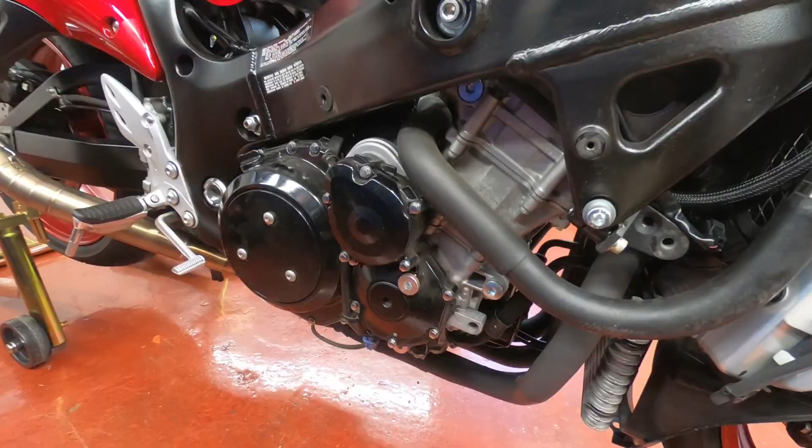Alright guys, I'm gonna check the valves. I know I was supposed to do the coolant video today, but the valve clearance has been in my head. I just wanna knock this one off to take it off my to-do list. So obviously the seat comes off, the tank comes up, and the side fairing has to come off so we can have access to the crank and the timing mark here.

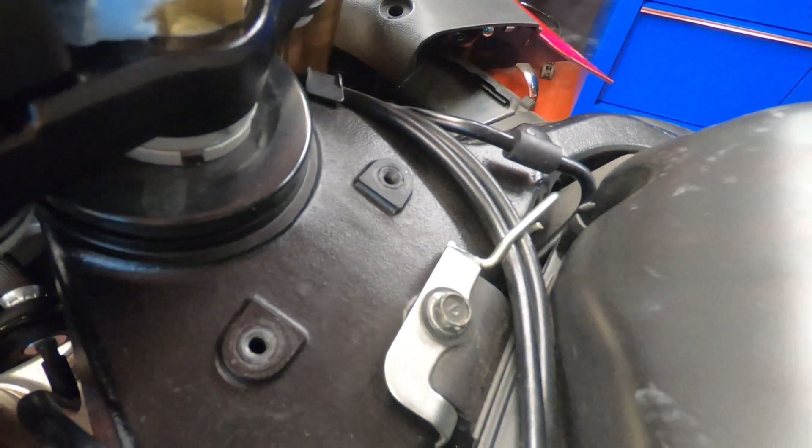Okay, next step, I have to remove the air box. But since I'm gonna clean the air filter anyways, I'm gonna take off the cover first. But if you want, you can take the whole assembly. And before you do that, of course, you gotta take off this bracket here that holds the cables. And keep in mind how these cables run so they don't confuse you later. Remove this connector for the air temperature sensor.

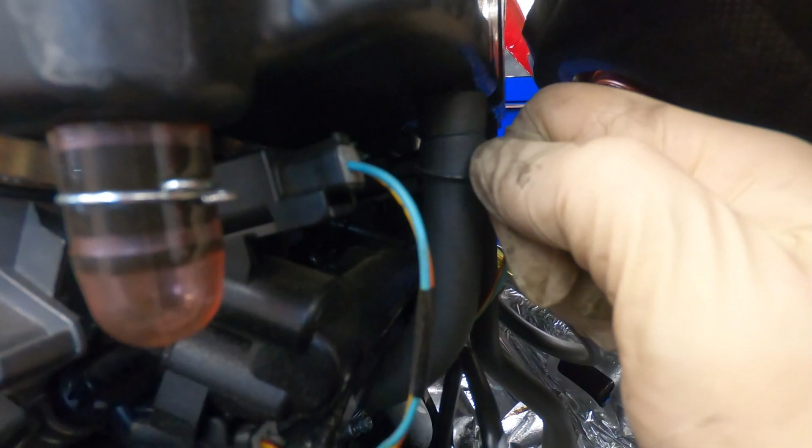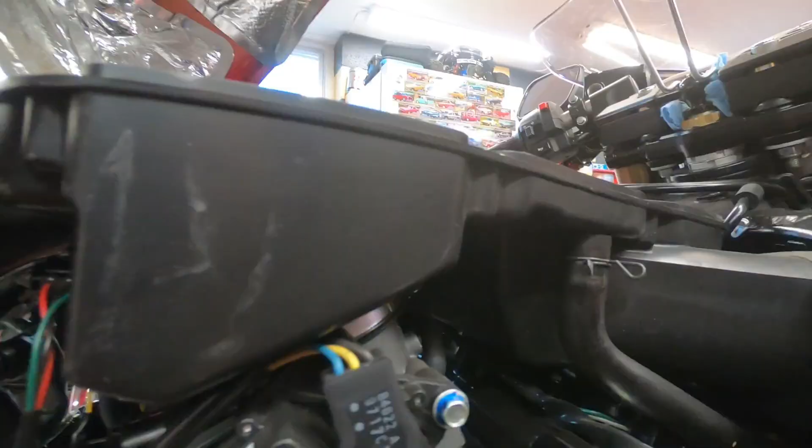And then we got a hose over here. Just squish this with your channel lock fingers. Same thing here, there's another one. And with this you can use my lovely trick. Okay, going to the other side. We got one more hose over here. And then we have this connector. I'm gonna pry it off from the bracket, from the back side first. I'll show you how it looks.

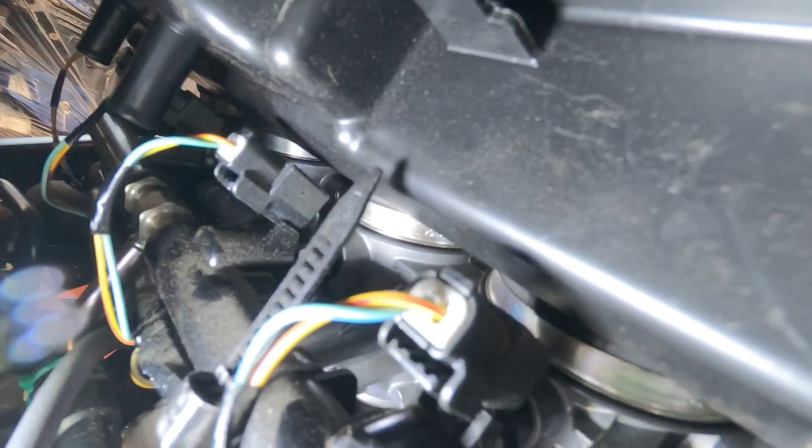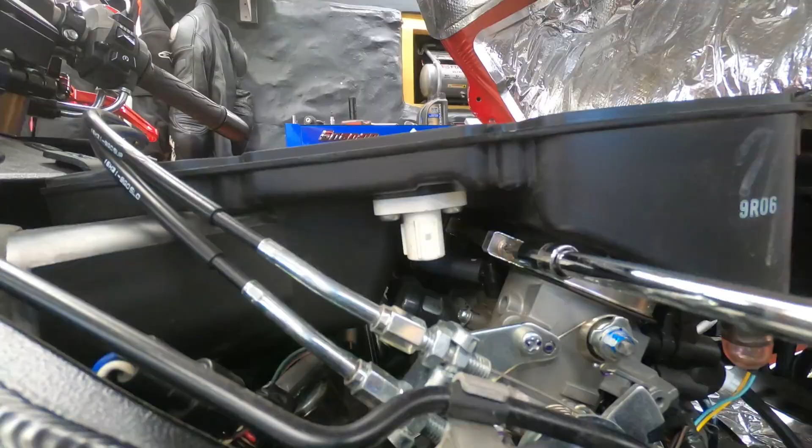That's how that bracket looks, where it goes over here. Now I just have to loosen this bolt here, and you just have to loosen it a few turns. You don't have to completely take it off. And then same thing on the other side. Now I have to break the airbox free from the throttle bodies. So whatever it takes, you know?

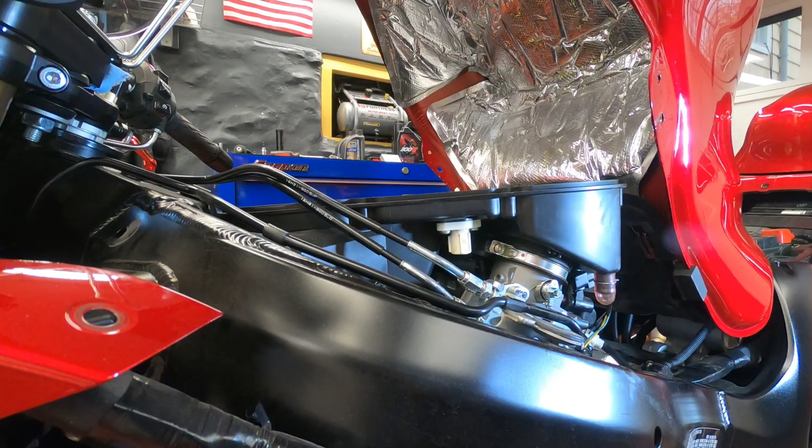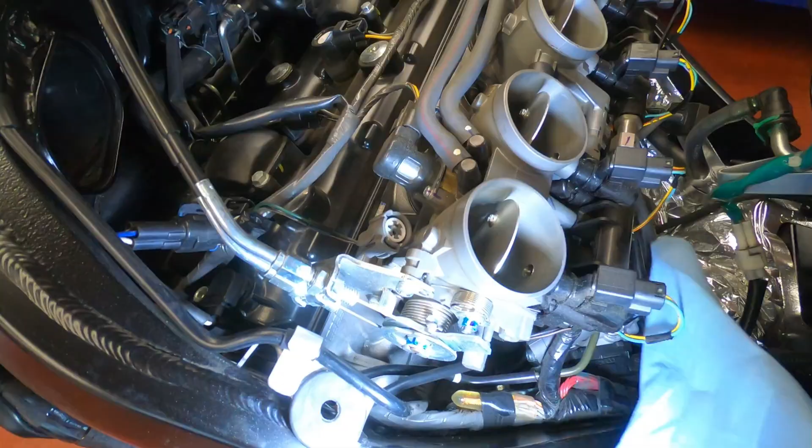Okay, now to protect the throttle bodies from anything falling in, put a rag. This way nothing falls in there. Because if it does, it's gonna get sucked up in the engine and we're gonna have a bad day. Next, unplug this guy here. To make some more clearance, I'm gonna take off this bracket here and this one.

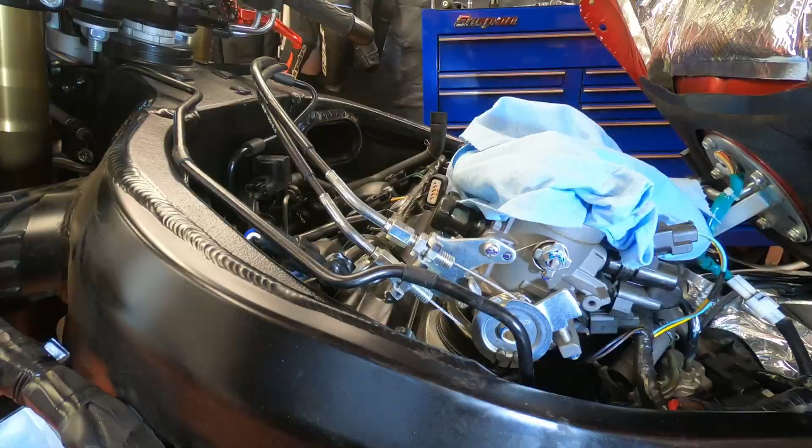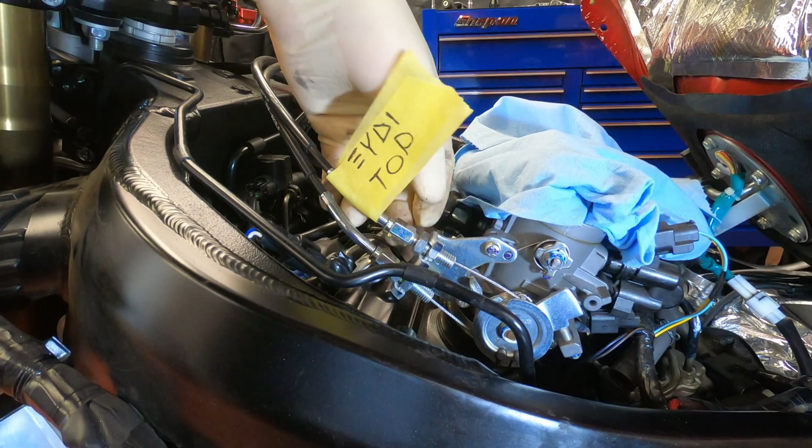Next, to make some space for the valve cover to come off, I'm gonna remove these cables. And so I don't get confused, I'm going to mark the top one. Top. That's for my Greek cooking people. Size 12. I thought it was a 10 and then I thought it was 11, but it's a 12.

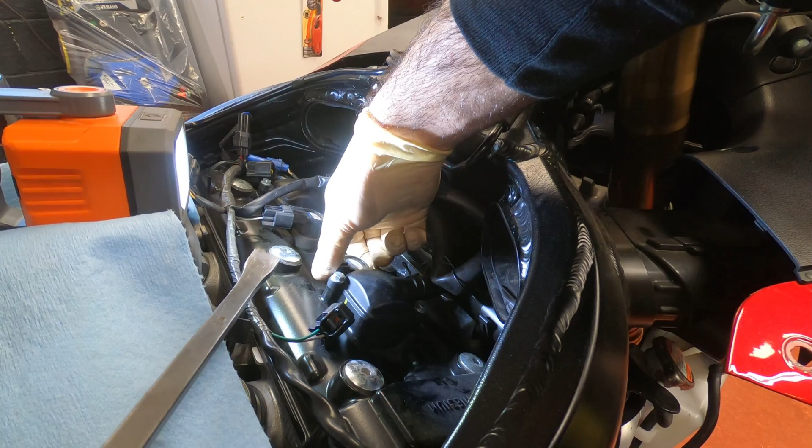Now unplug the ignition coils. Man, look at this guy, how tight it is in there. Gonna give it a twist. Just be careful when you use a pry bar. Don't break the tip off. So twist it, that's gonna break it free a little bit, and then just use this to help you a little bit. Okay, now you can see there's some debris, some little rocks.

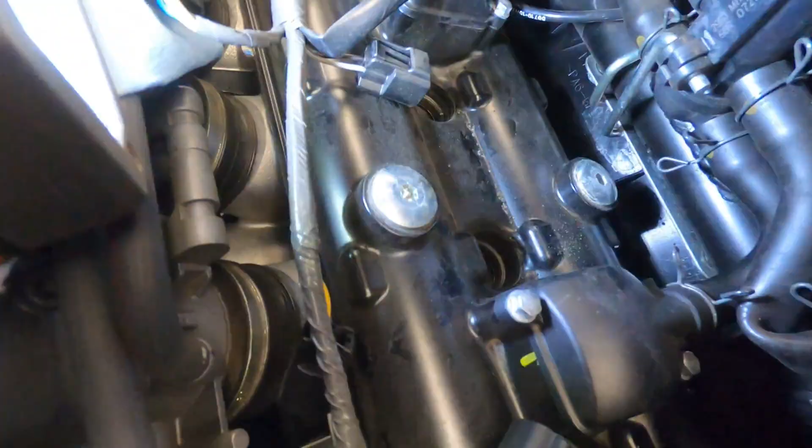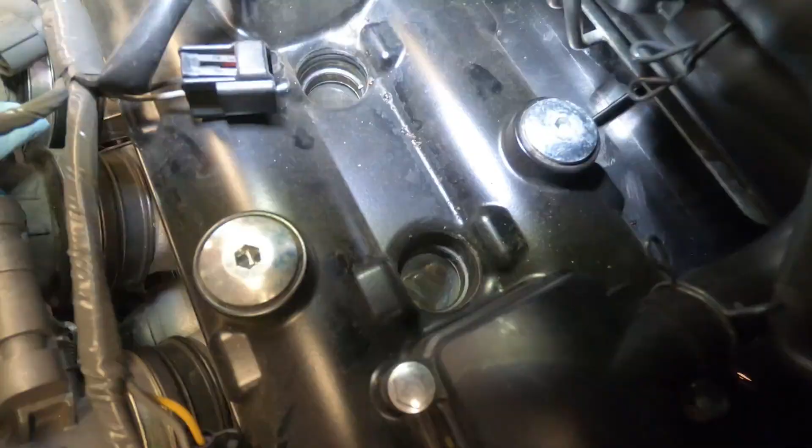See this stuff? So to prevent that from falling in, I'm gonna blow it off carefully. And also I'm gonna blow inside the spark plug holes because I'm gonna change the plugs anyways. And also it's gonna be easier to spin the engine over. And now I'm just gonna break the plugs loose. I'm not gonna remove them, just make them come loose. And we're gonna remove them later.

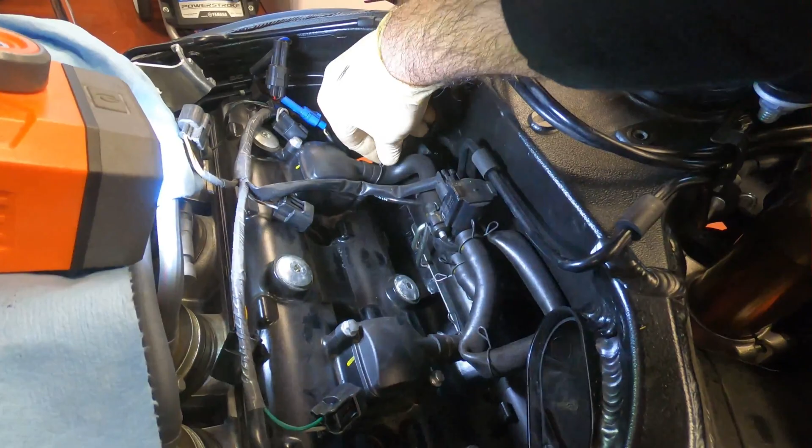And since I'm here, I'm gonna pop this off. And this one. This is just useless emission crap. It's gonna come off one day. We're gonna eliminate it. Okay, now we're gonna go on the other side again. This is like exercise from one side to the other. Okay, this is fighting me too much. So I'm gonna have this in to hold pressure on the tab. And then rock the boat. And then this blue one.

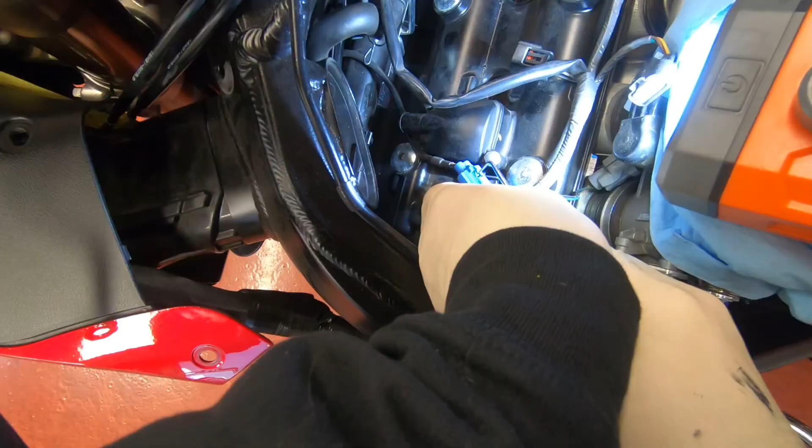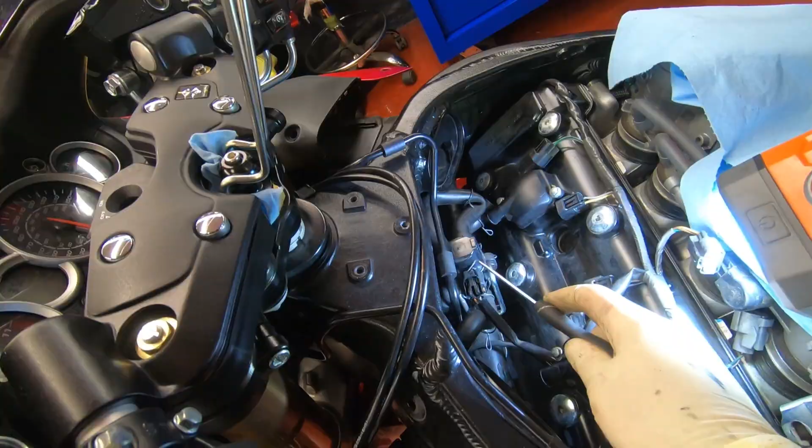And might as well take out this emission crap thingy now. I'm not gonna eliminate it yet, but I'm gonna remove it to have more access. Yeah, all these connectors are fighting me today. Then look how much more space I have now to work. Look at that. And now tuck the wires out of the way as much as you can. I'm gonna put a pinche zip tie to hold it because this is really irritating. Okay, broski is almost there.

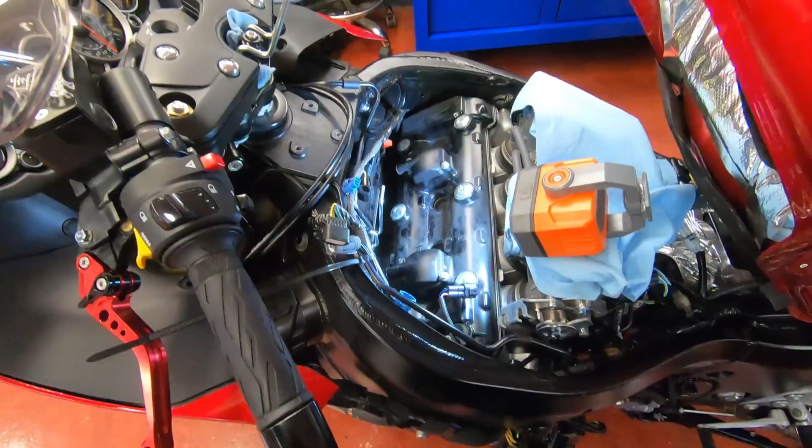Now we're gonna loosen these 6 Allen bolts to remove the valve cover, and we're getting really close. So you want to start from the outside first, like 1, 2, 3, 4, 5, 6. Start from the edges and work your way inwards. And then for these inner ones, the socket doesn't fit, so you gotta use one of these.

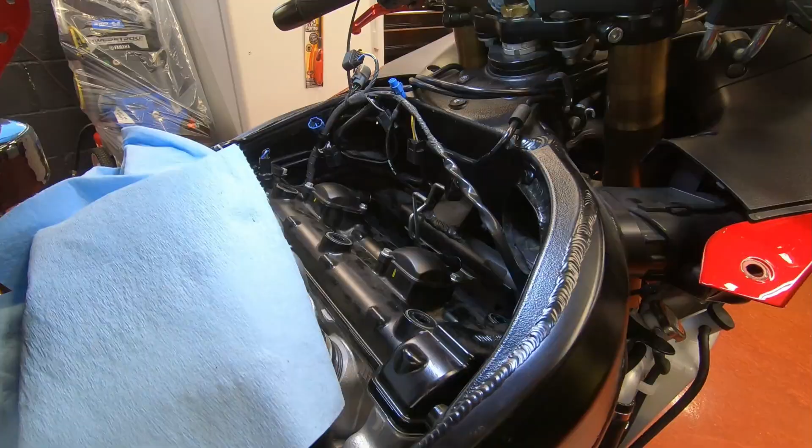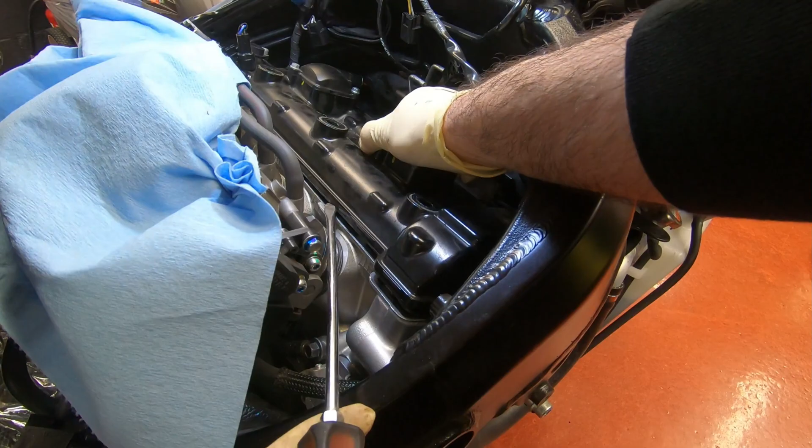Okay, now we're ready to remove the valve cover. There's a spot here, looks like we can pry. Very careful though. Be very careful not to crack or scratch. Oh, that's working nice. Oh yeah. It could have given us a little bit of room. That's all we need, just a little bit more room.

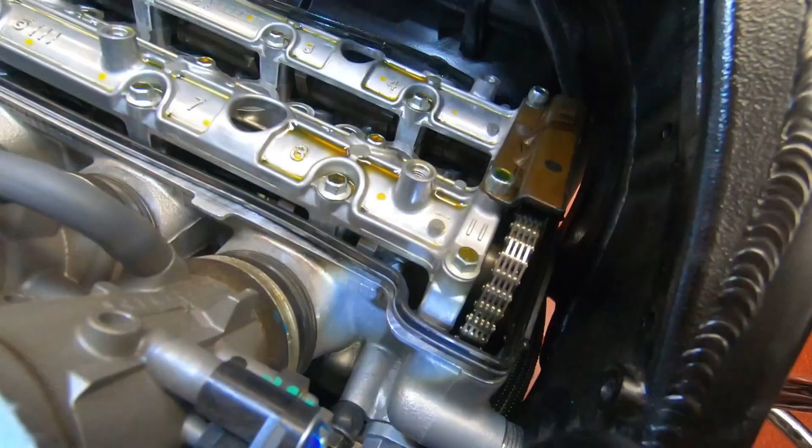And then just remove the gasket. There is some glue on these edges right here. Just pull it up. Bam!

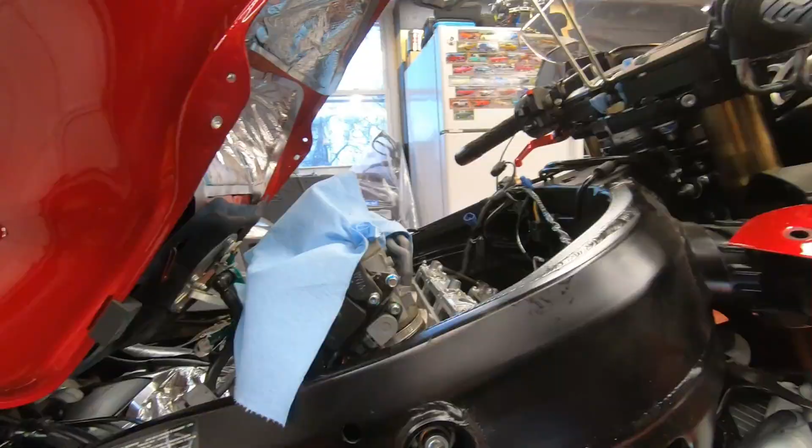Alright guys, this is where the fun begins. This is where we have to be like engineers here. Okay, next we're gonna remove the crank cover here to spin the crank and the timing mark.

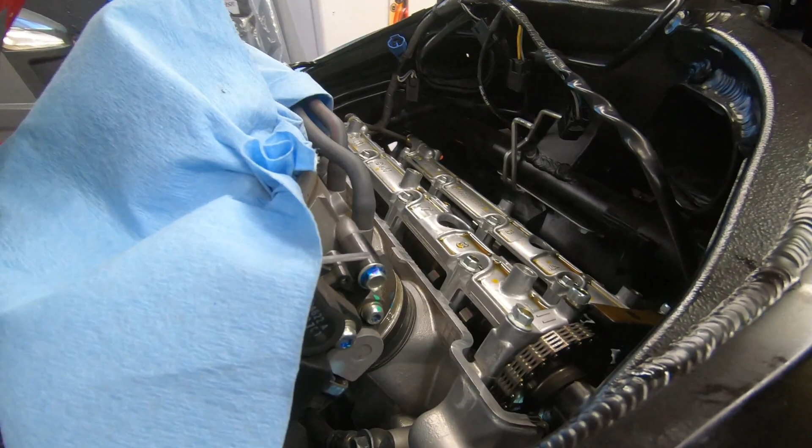For every full turn the crankshaft makes, the valve train spins half. So if I spin the crank 360 degrees, that's one full circle. The camshafts are only gonna spin 180 degrees.

One other thing is the timing chain. It spins like this. So when you spin the crankshaft, always spin it the way the engine spins. Because if you go the other way, that could put a load on the tensioner. It's over here somewhere. Say hello, tensioner. It's right there. It could put a load on that and it's not good.

Now, if you do go over, let's say you spin the motor and you go over a little bit of the timing mark and you're like, oh crap, I have to go back a little bit. It's okay to go a little bit back and then go forward again. But don't be spinning full circles backwards, okay?

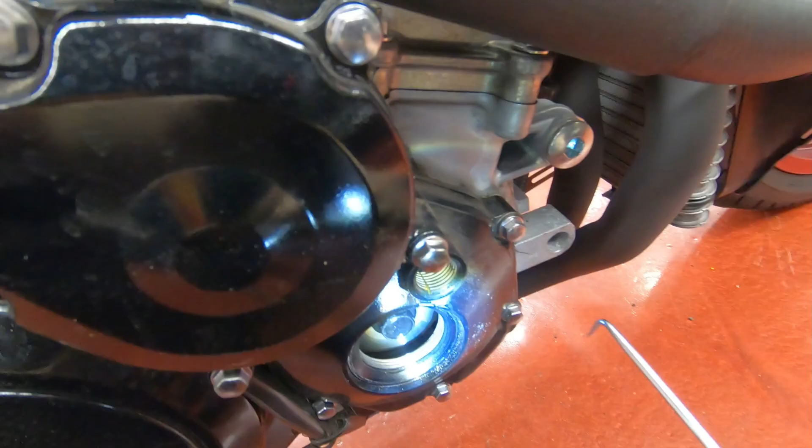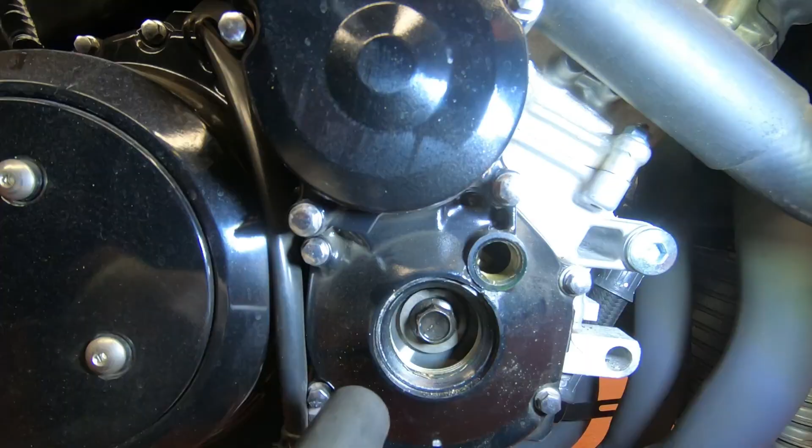Okay, that's fine. Now over here, you can see there's a line, this line here. So what you do is you spin the crankshaft from this bolt and then you look inside. There's gonna be a mark that's gonna line up with this line. And before I forget, this is the moment where I take the spark plugs out to make the engine spin easier. Okay, let's see if we can find that timing mark now.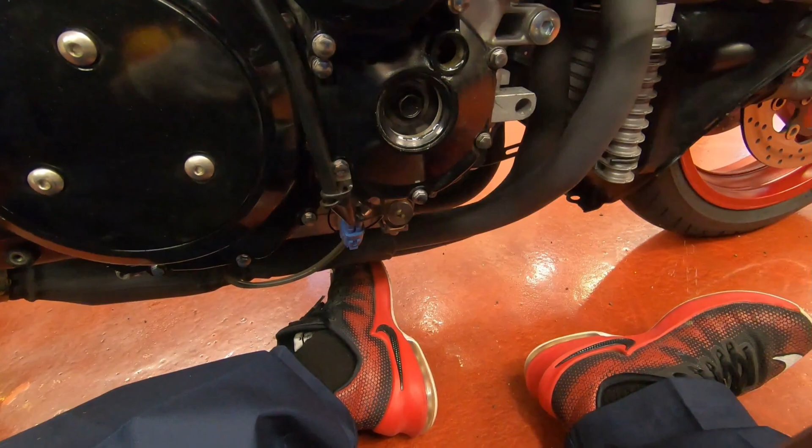Okay, right there you can see this line inside, and the crank lines up with this line here. So when those two lines line up, that's either gonna be your top dead center for cylinder 1 or cylinder 4, because like I said, for one crank revolution it makes the valve train spin at half.

Okay, so here you can see on this cylinder over here where the timing chain is, this is number 4 and that's number 1. The mark is on the crank, but number 4 is on TDC because like I said, for every revolution, the cams spin half. So I could start checking the valve clearances on this side for number 4, but I don't want to confuse somebody. So I'm gonna spin the engine one more time and align cylinder number 1 on top dead center.

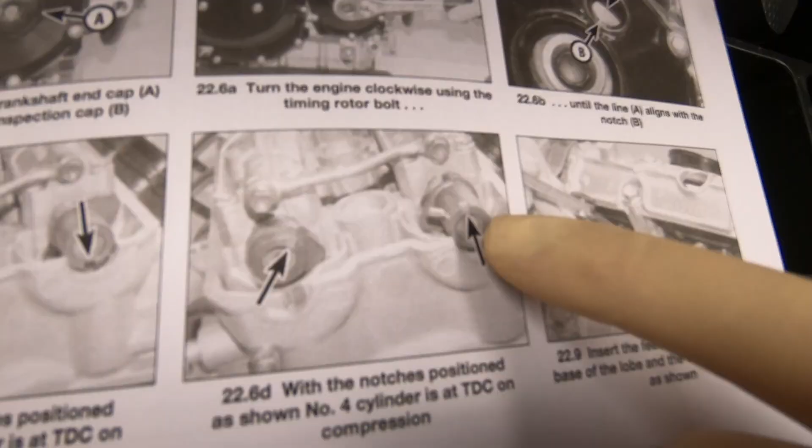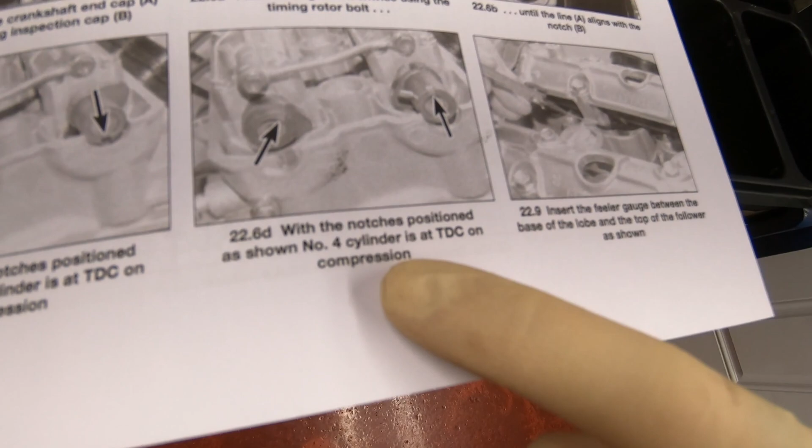And over here, you can see this notch here on the camshaft. And there's one over there. So if you look at that and you check this picture, where the arrow is pointing, that's those notches that I showed you. So when that happens, number 4 cylinder, the piston is all the way up on TDC, top dead center. I messed up my book, damn it.

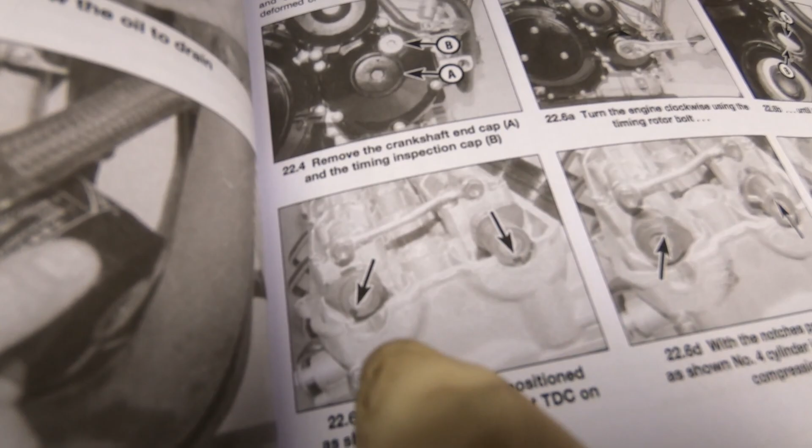Anyway, I'm gonna spin it one more time and those marks on the cam should be like that. So I'm gonna spin it one more time and bring cylinder 1 on top dead center, which means the piston on cylinder 1 is gonna be all the way up. Okay, broskis, I spun it and you can see those marks here are not where they were before, and the lobes are not pushing on the pucks on cylinder 1.

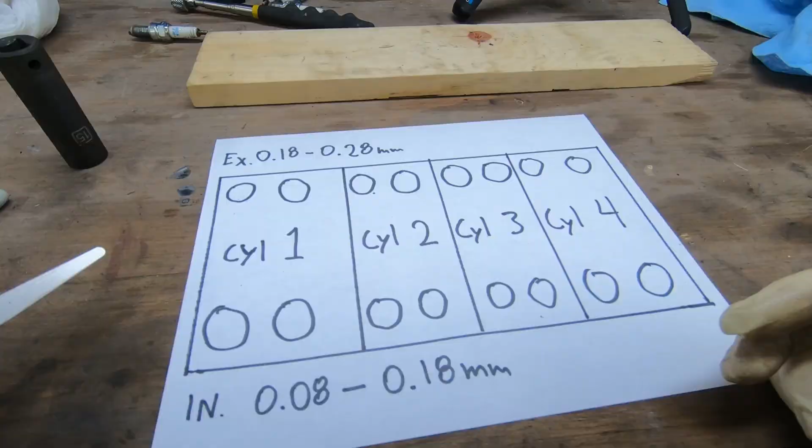Okay, broskis, I'm not known for my Picasso abilities, but this is a cylinder head. Cylinder 1, 2, 3, and 4. Exhaust valves, intake valves, the specs for the intake valves, and the specs for the exhaust valves. So I'm gonna measure the clearance with a feeler gauge now. I'm gonna start with cylinder 1, both exhaust valves.

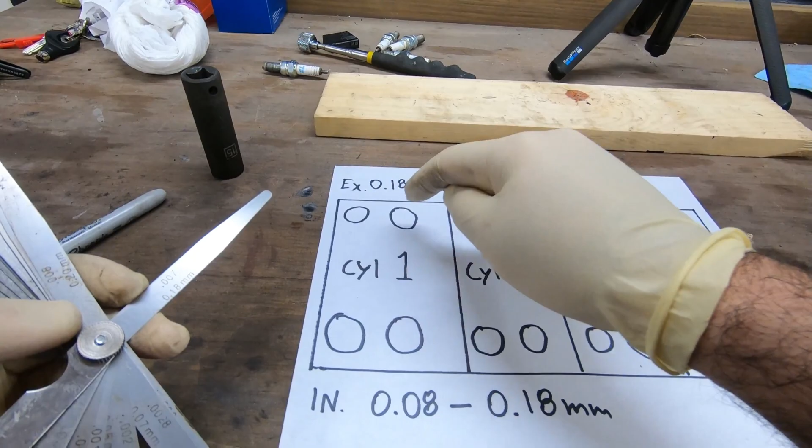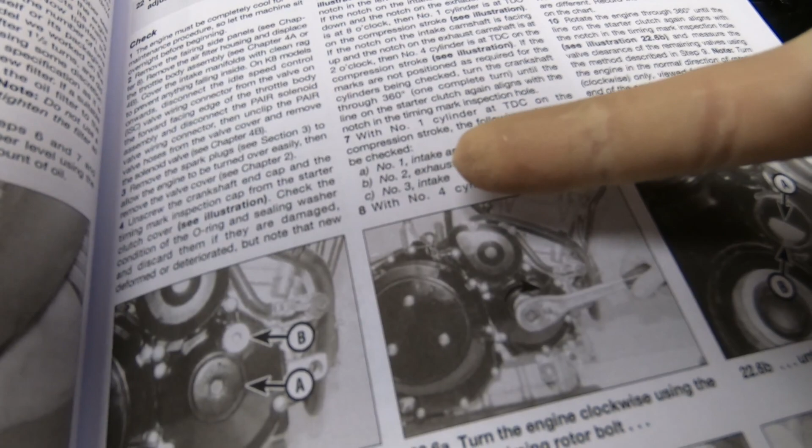So it's saying when I'm on TDC, I can check the intake and exhaust valves on cylinder 1 and cylinder 2, the exhaust, blah blah blah. What they're trying to say basically is you can only check a valve clearance when the cam lobe is not pushing on the puck. Like this one right now, it's away from the puck, so I can measure that. You're gonna see how I measure it.

So we got cylinder 1 here. I'm gonna start with exhaust. And I got 0.18 millimeters. The top one is inches, so don't look at that, look at the bottom one. I'm gonna give this a clean. And we're gonna go stick it in now. For me, it's kind of hard now because I'm holding the camera. I'm trying to get a good angle for you guys.

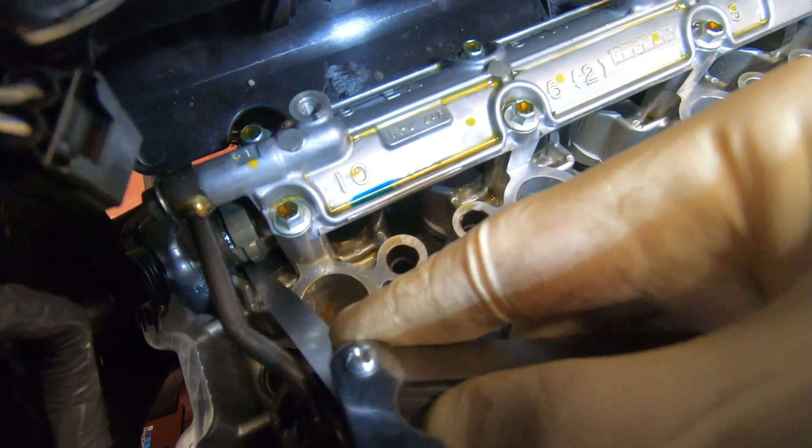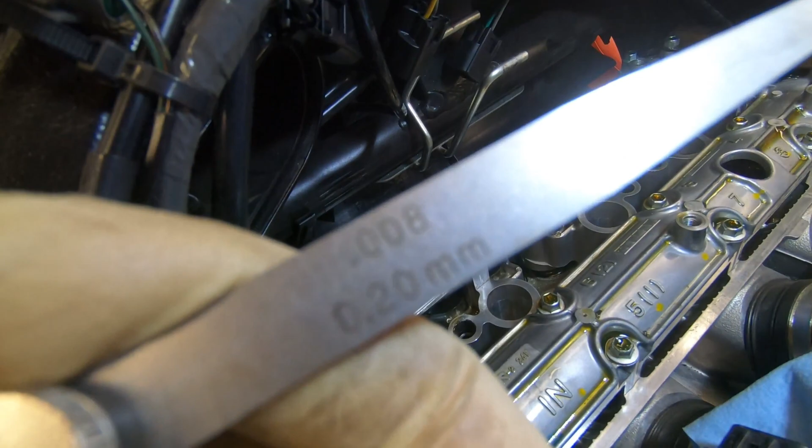So I have 0.18 and it fits nice, okay? Okay, from 0.18 now, I'm gonna move to a 0.20. See if this one fits in now. And it has to go in with a little drag. I mean, you're gonna feel it. It doesn't need too much pressure. 0.20, that fits nice. Okay, so I'm gonna go up another step.

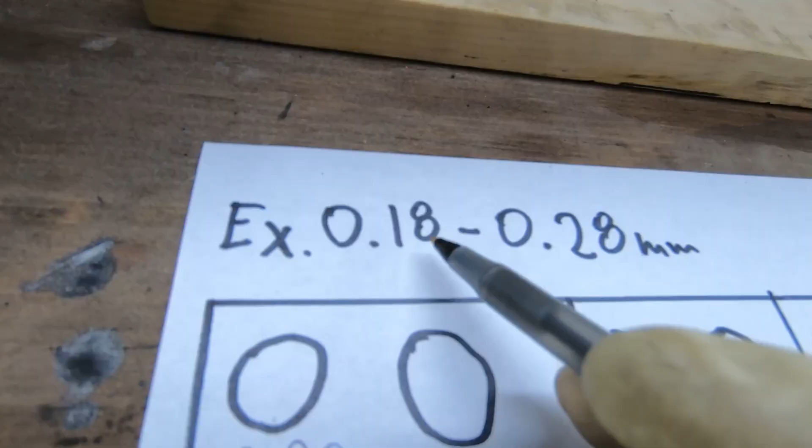Okay, now I'm gonna try 0.23 millimeters. Let's see, broskis, if this one fits. Okay, this one does not fit. So the 0.20 seems to fit the best. So I'm gonna record that 0.20. So this is within spec. That means no adjustment is needed. If it was below this number, it would have to be adjusted. And also if it was above this number, it would have to be adjusted.

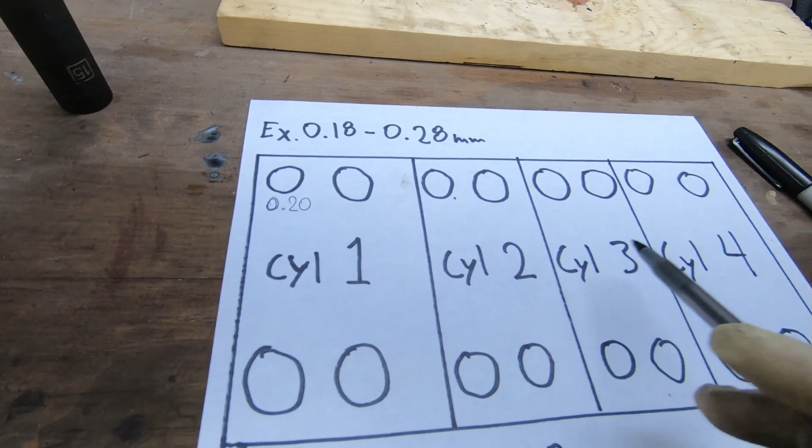So next I'm gonna check the next exhaust valve right next to it on cylinder 1. And you can see on all the cylinders there's 2 exhaust valves and 2 intake valves. Alright guys, I checked these clearances. I rechecked the first one because it was hard with the camera and it ended up being 0.23. These are the ones I checked. They're all within spec, they're very healthy. I'm gonna spin the engine 1 revolution on the crank like I said, and that's gonna bring cylinder 4 to the top, and I can check the rest of the valves.

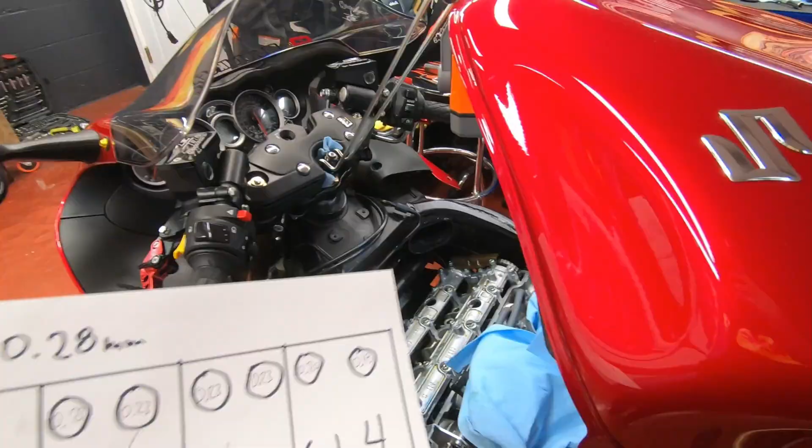Alright guys, I checked all the clearances. They are within spec. This one is the closest. This one is on the edge because you can see 0.18 is the minimum for the exhaust. That's right on the edge there.

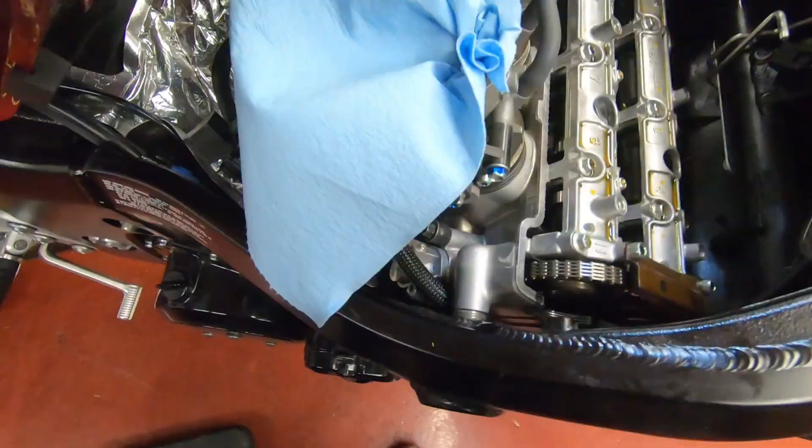Now let's say if you do have to adjust them, you have to loosen this tensioner here, remove it, loosen this thingy that holds the camshafts, remove this. And with this, you have to be really careful because if not, it could crack and then you're gonna need an entire cylinder head, because this is machined to the specific cylinder head. You cannot change these. If this breaks or wears, you have to get the whole cylinder head. Once you do that, camshafts come out, and then those round pucks, they have shims with different thicknesses, and you have to calculate what thickness you need.

So I'm fortunate here, I'm good. I know this is not a complete video of checking clearance and adjustment. At least now you have an idea how to check the clearances. But I do know down the road, eventually I'm gonna have to adjust a valve, especially that one.

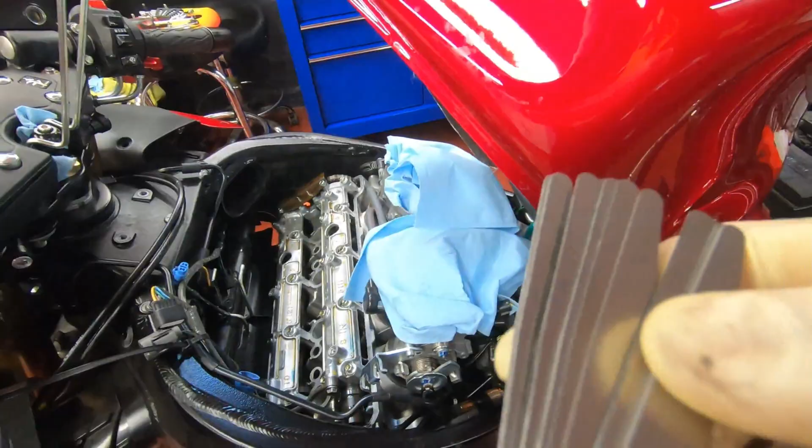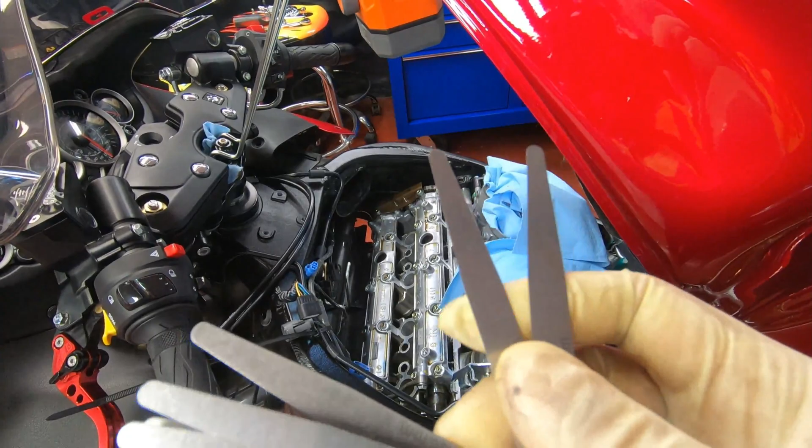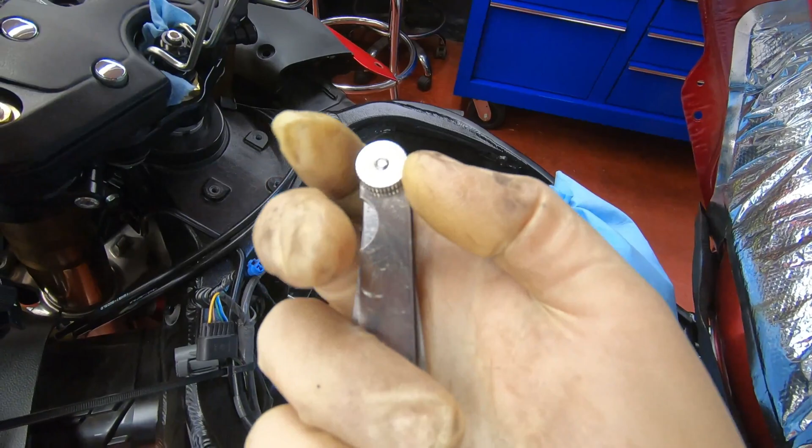Another thing, when you're using a feeler gauge, let's say you're checking 0.25, make sure it's just one blade, not 2 of them like right now, because this can fool you. You're gonna get a wrong reading, so make sure you only got 1 blade. Another thing is, I've heard of people dropping this nut from the tool because it gets loose from moving the blades. It gets loose and it can fall. So always keep an eye on this, that it's snug.

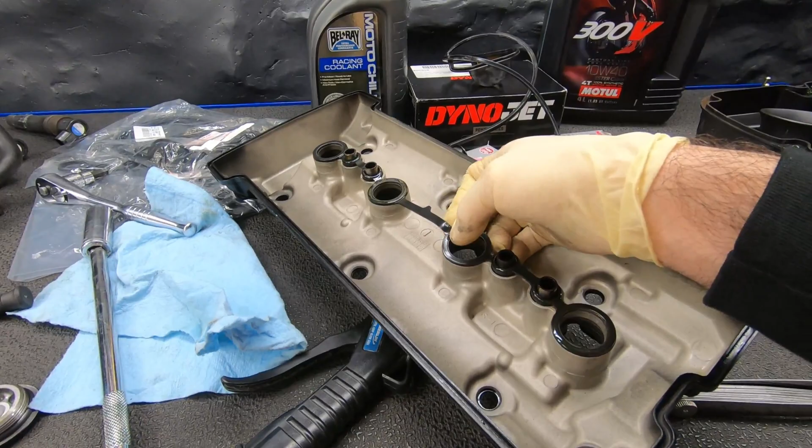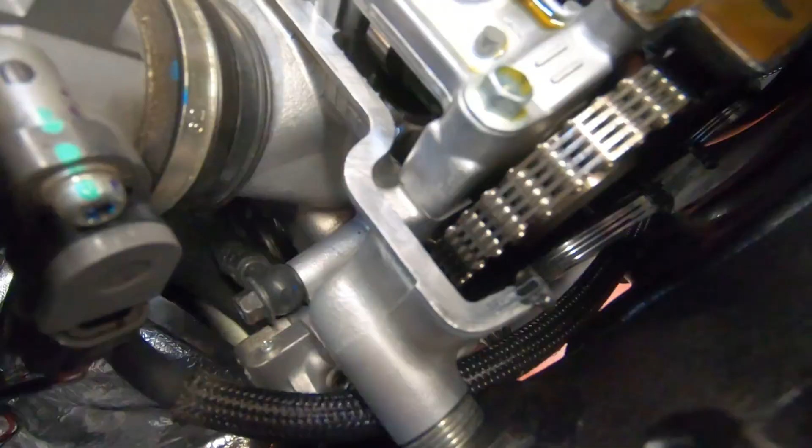Okay, my next step is I'm gonna remove these gaskets here since I have it off. I got new gaskets. This is the valve cover gasket. This is the part number. And this is for the spark plugs. So here you're gonna want to clean this glue off. It's gonna be really tricky, I'm letting you know. Like this crapola, you see, you're gonna want to remove this glue stuff and try not to drop it inside the engine. If you do, it's not the end of the world, but try not to drop that stuff in there.

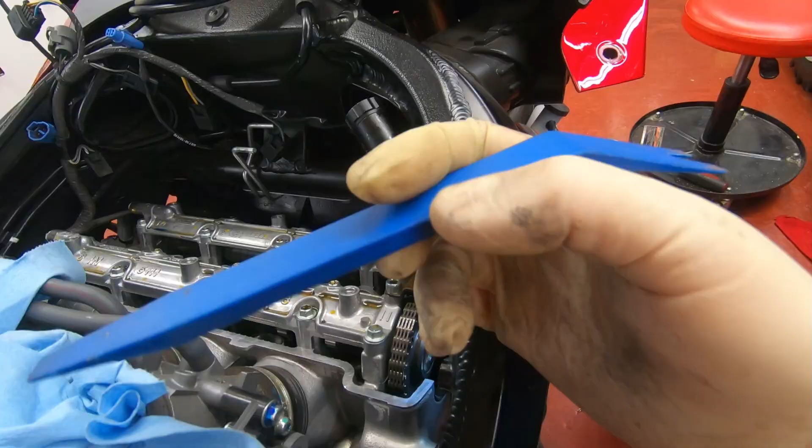But you have to clean it to put fresh glue. And you have to be delicate not to scratch the surface. This plastic tool is good because it won't scratch the cylinder head. It's obviously softer because it's plastic. I'm kind of scraping that glue off with this. Just gotta be patient.

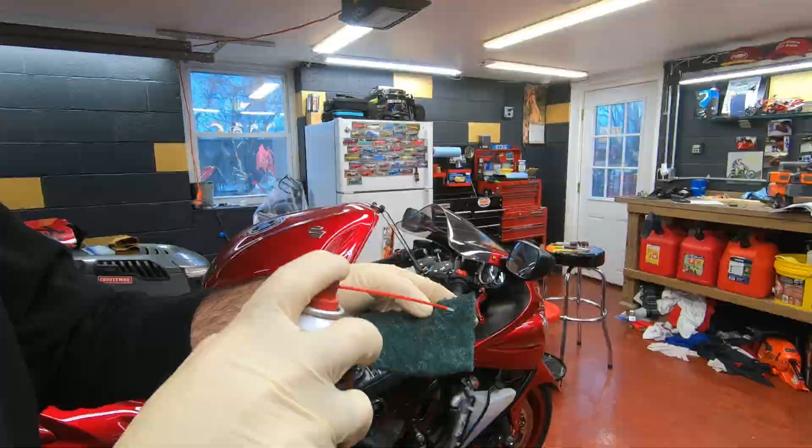Alright guys, another day here. I cleaned that glue off. It took me a good amount of time. I must have spent like an hour cleaning that glue off, but it's really delicate work. And then another cool method is a piece of Scotch-Brite with a little brake cleaner. Scuff that glue off, carefully. And at the same time you can pick at it with your nail to remove some of that glue carefully. And then when you're all done, put a little brake cleaner and clean the surfaces up.

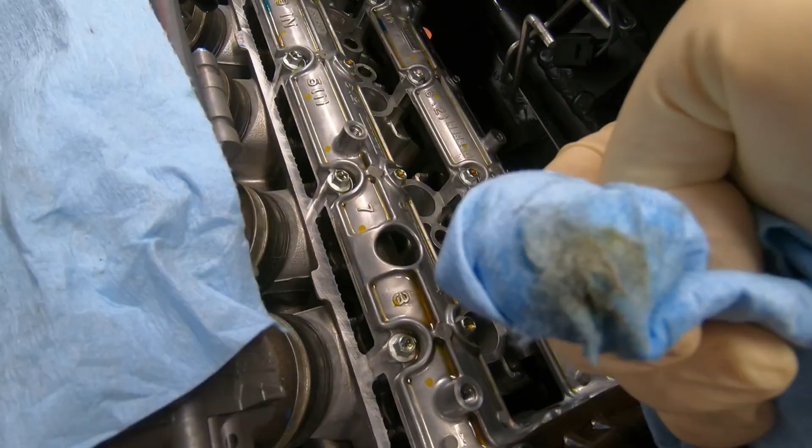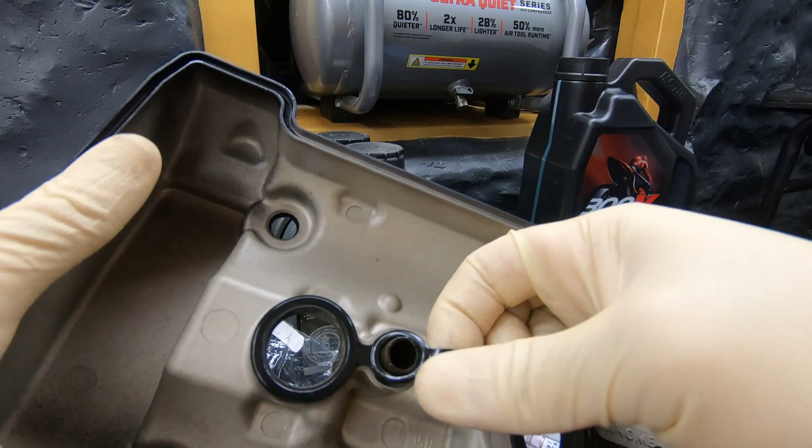And of course do these as well, the spark plug holes. You see all that oily stuff? And then the valve cover itself as well, because there's oil in here. A little bit, not too much, but you can see there is some oil. And after you clean that, you take this gasket off. Bada bing, bada boom. Make sure that's nice and clean.

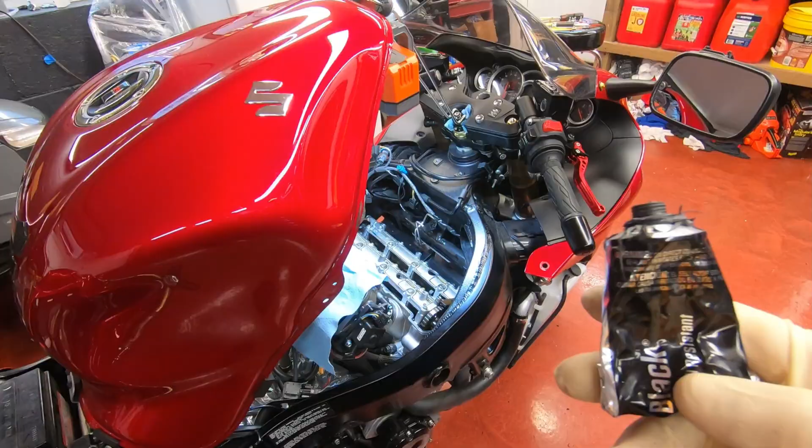And also clean up these rubber gaskets for the bolts and inspect them. If they're torn or really squished, they should be replaced. And now I'm gonna use some RTV and I'm gonna put it where they had it before.

Nice amount. And then the other half moon, you can get it from here. Okay, so I got the glue on. Most important is to get those edges, the corners, like right here where the corner is, because that's the most likely spot to leak. I got all of them. Same thing on this side.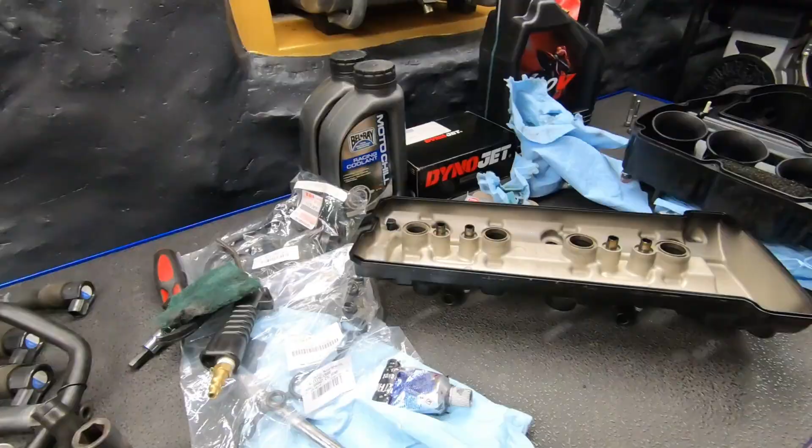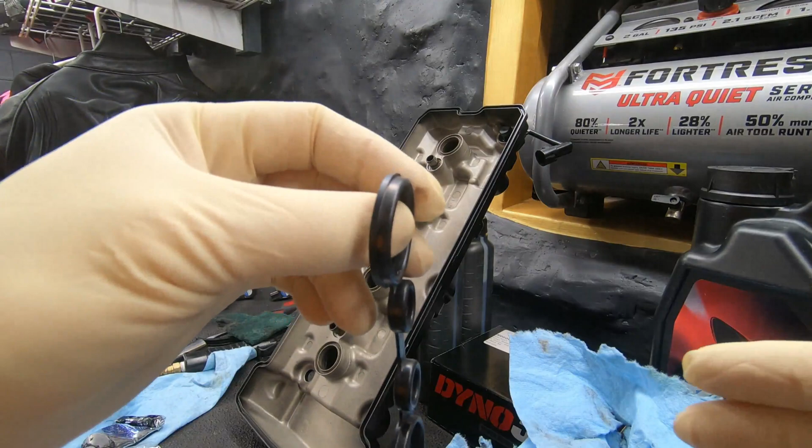Now the glue that I'm using, it says to leave it for an hour to get a little tacky, then bolt down whatever you're bolting down. It seems a little bit too much to me, but I am gonna leave it a little bit to dry. In the meantime, I'm gonna put the gaskets on here. This is the spark plug ones, and I want to clarify it goes a certain way. This thing here is for a reason. This little wiener right here. So that little wiener points towards the front of the bike.

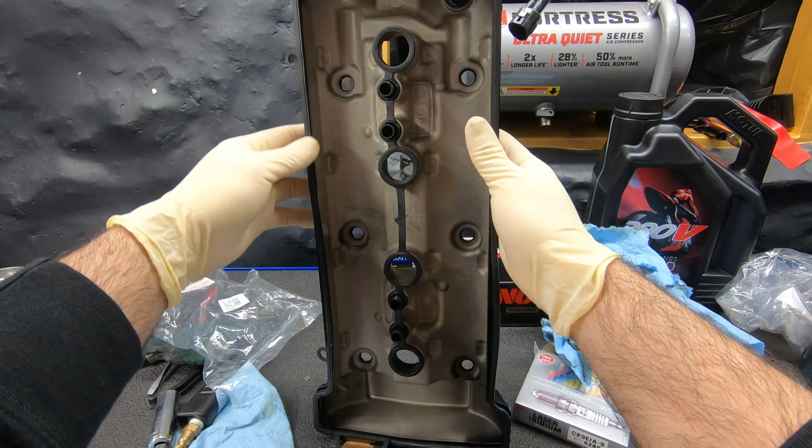And the reason for that is because these holes, along with these tubes, are not in a straight line. They go like this, kind of. Now, it was a struggle to get the valve cover off, even with the gasket left on the bike. So I have a feeling it's not gonna go in with the gasket installed on the cover first, but I'm gonna try it. If that doesn't work, I'm gonna put the gasket on the cylinder head first.

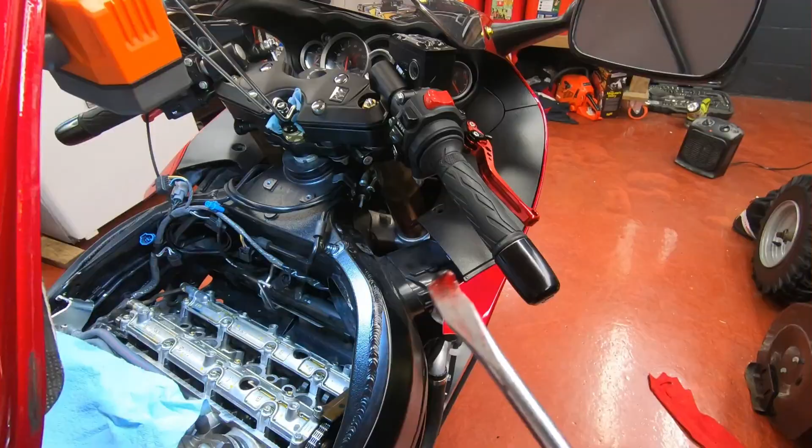And while the glue is still curing, I want to show you all the old gasket material. You see all this black stuff? That's from the old gasket, the old glue that I scraped off. And the nice trick is I dropped a little piece, but I put some grease on the screwdriver. And you see this black piece, that's old glue that kind of fell in there. I was still able to see it. So I just stuck the screwdriver like this and I took it out.

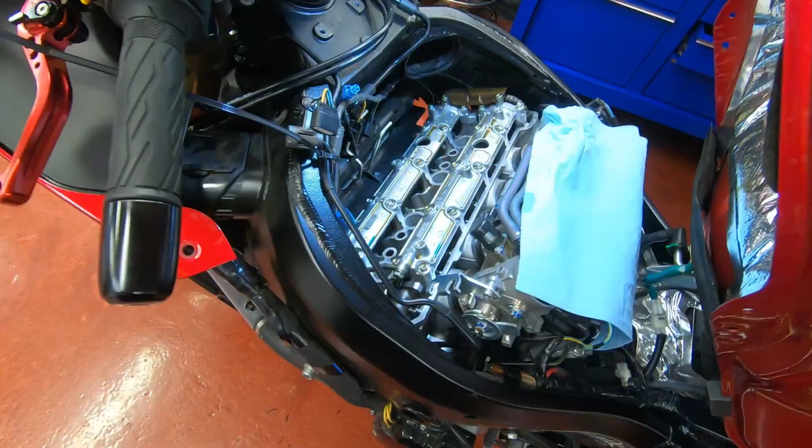Another tip, what you can do is you could leave the gasket on the cylinder head without interfering with that glue and the half moons. Leave that on there and remove the valve cover. This way you don't need a new gasket or glue. But obviously it is better to get a new gasket. But if you want to do a shortcut, you can do that.

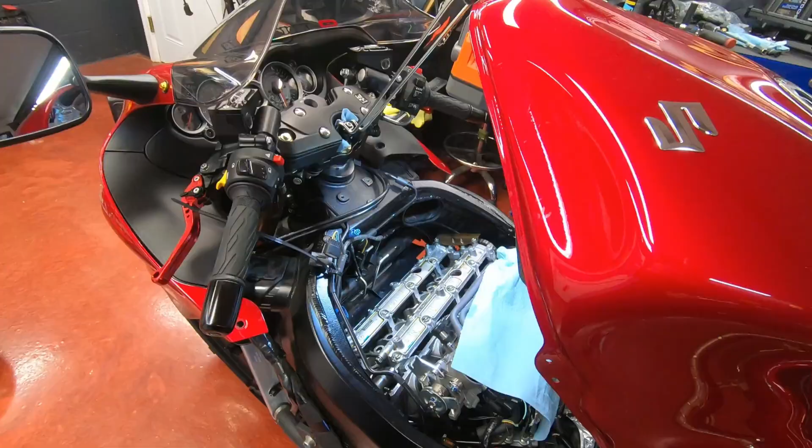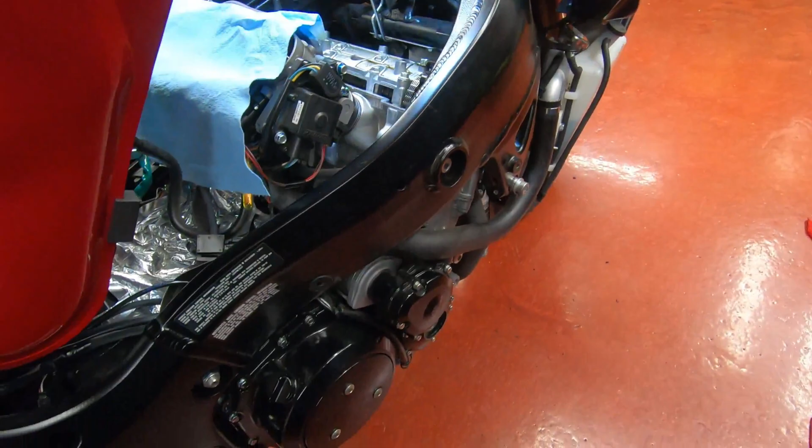And also another shortcut, if you believe your valves are gonna be in spec, just pop the tank off, take out the air box, whatever, and leave this fairing on. You don't have to take it off. And then what you can do is you can tap the starter and have the engine spin. But to do that, you kind of need to have some kind of experience so you know which valves to check.

All right, let's see if I can fit the valve cover with the gasket installed. To make it a little bit easier, I'm gonna remove the cam position sensor. Okay, let's try this again. Oh yeah, it's gonna go now. And make sure the gasket is still on. It hasn't like peeled off. Okay, broskis, I have it on.

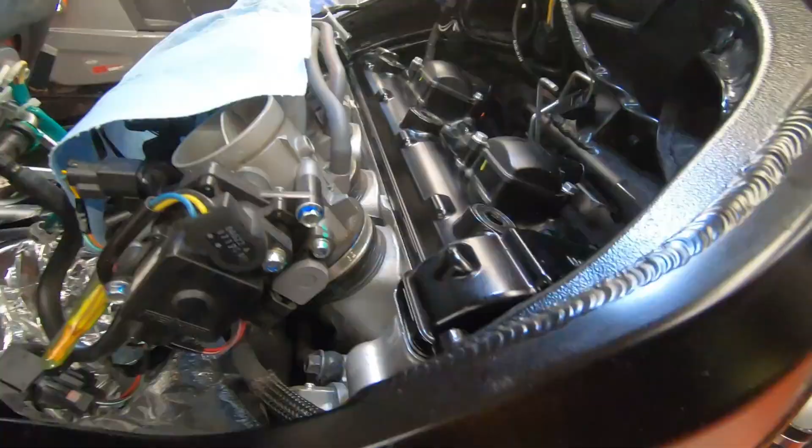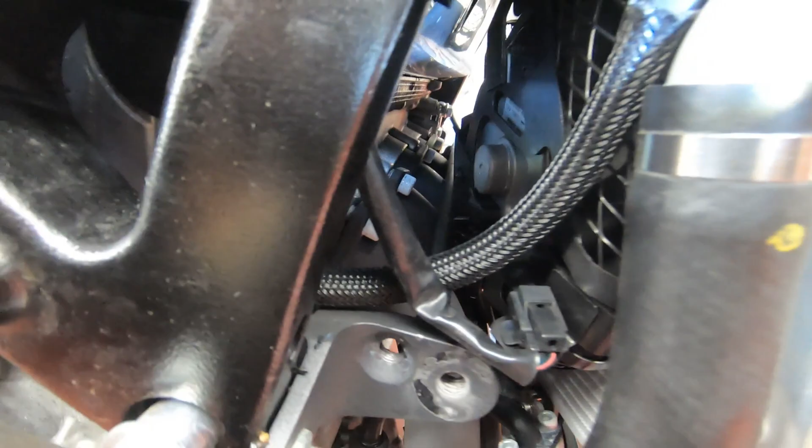Make sure the half moons are where they're supposed to be, like they're not wedged inside the cylinder head. Make sure they are sealing. And also inspect the gasket all around. Make sure it hasn't peeled off or got caught somewhere. Especially back here where you can't see. If you want to double check, you can use a mirror and visually check that the gasket is in place.

I also want to mention, don't keep on pushing on it, because when you do that, you keep squishing the glue out. So you can push it maybe one time, make sure that it sits square everywhere. One time would be acceptable, but don't keep on pushing on it.

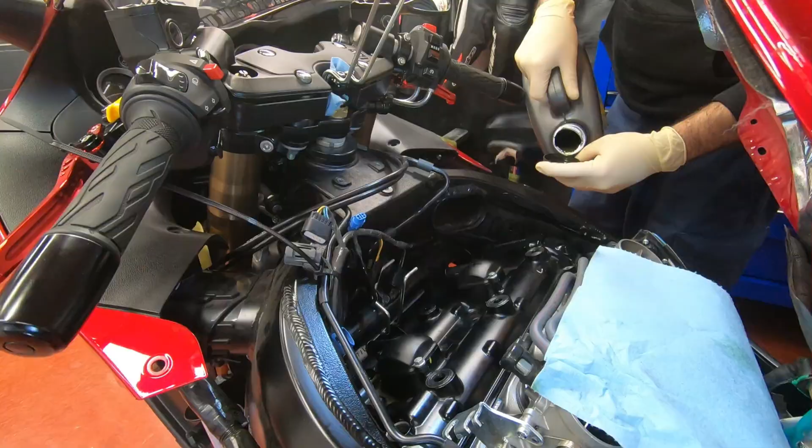Okay, now the repair manual says to put a little oil on these thingies, and it makes sense. It's kind of like when you put oil on the oil filter, so it slides easier. And all you need is just a tiny bit, nothing crazy. Just a little bit moist, you know? Because lubrication is key to penetration.

Wow, I can't stop doing this.

Okay, let's see what the torque is now. Valve cover bolt, 14 Newton meters. Those bolts, it's hard to fit a torque wrench with a socket. So I'm gonna go by hand and kind of feel that out. Okay, broskis, and always when you install, start from the center, working your way out. And go little by little. It's not a marathon, you know? It has to go down equally. Keep working your way like that, from the center outwards.

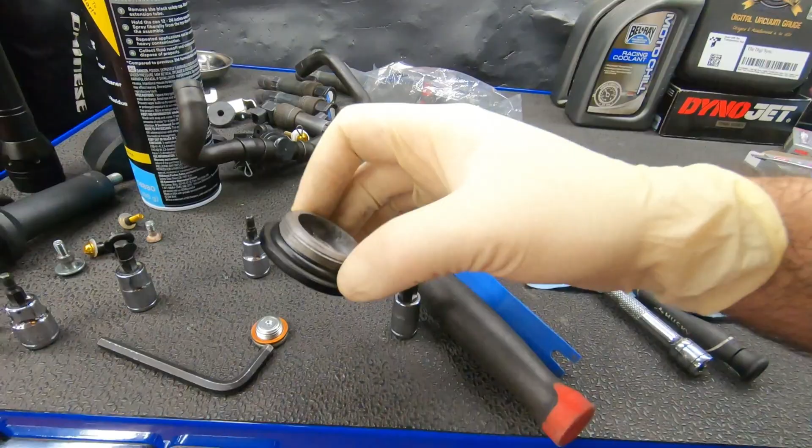Forgot to mention one more thing. When you put these on, for the crank and the timing mark, make sure this gasket is good. It's not worn or flattened, as well as this copper washer. That's all.